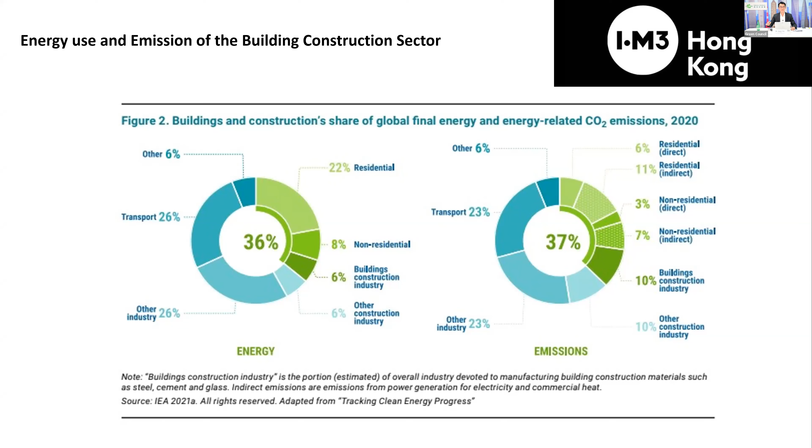And to build on from Professor Zheng's idea, to reduce the carbon emissions, there are clearly two major directions. The first one is, of course, to reduce the embodied carbon from the manufacturing of materials and application of materials on the construction site. And secondly, another emerging direction is to align the material properties with the long-term renovation strategy.

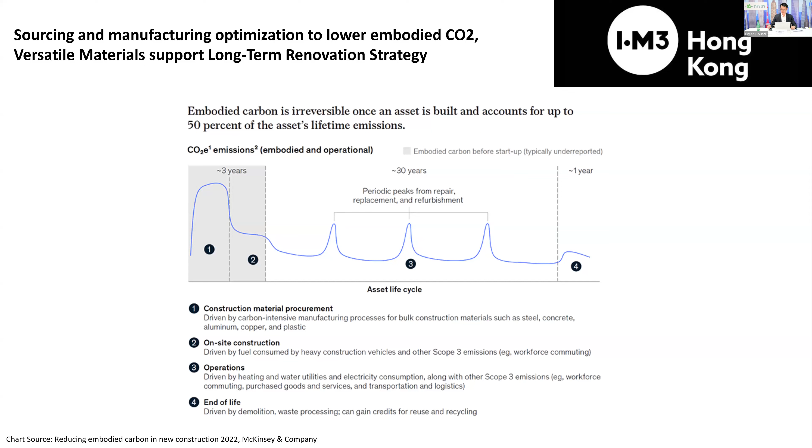And there are also new materials that may enable the reduction of operational carbon, for example, to improve the heat insulation of the building, so that the energy efficiency of the building can be improved. And to determine where we can reduce CO2 or who has the responsibility to reduce CO2, we need to get used to seeing the building sector from this full value chain perspective.

Because the building sector is not a single sector, it's instead a full value chain or full supply chain, from the extraction of raw materials to manufacturing of construction materials to building use and to end of life. Because nowadays, in reality, a lot of material suppliers still find it hard to justify their green solutions or green product design to buyers or building designers. A lot of the time, green materials involve a change of supply chain and a change of people's old practices, and inevitably a little bit higher cost.

So if the entire economy can look at the building sector from this full value perspective, then we may be able to determine who has the responsibility and who will enjoy the benefits, and be able to pass the benefits from one to the other and share some of the initial cost involved in green materials development and also green material applications.

And to fulfill that goal, just in line with the COP21 of the Paris Climate Agreement, we need to enhance the transparency and accountability of the carbon emissions in the full value chain. And a lot of companies have begun to use this methodology to assess their positions.

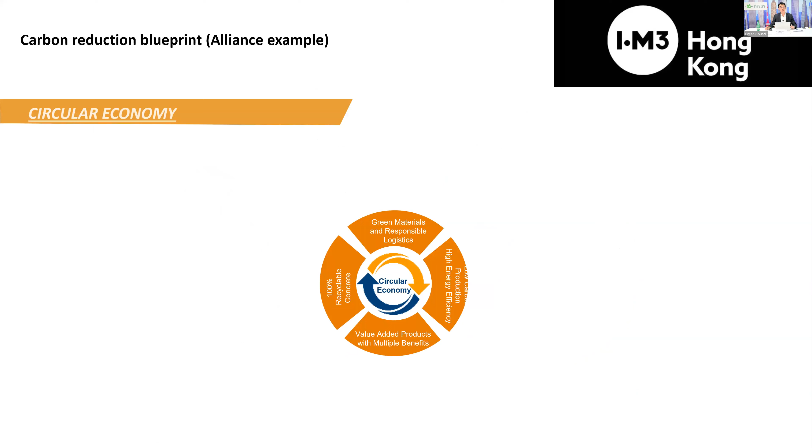And to reduce our emissions, I think many companies would have a carbon reduction blueprint. Here's an example from Alliance Construction Materials. Of course, first of all, we will need to assess the carbon footprints of our products. Because we have a range of product mix designs, we need to know their carbon impact on the environment. And then from the carbon footprints, we will be able to assess the opportunity for improvement on our manufacturing process or logistic process. And then we will be able to reduce our Scope 1 and 2. And actually, our green management system is designed from the findings of the carbon footprint of our products.

And we set ourselves a science-based target initiative to reduce Scope 1 and Scope 2 emissions by 30% before 2030 as compared to 2018. And in 2022, we have successfully reduced the carbon emissions of Scope 1 by 30% already, and Scope 2 emissions by 23%, which is a pretty significant amount because it is almost 1/3 of our total emissions.

And then we would have to work with our suppliers as well, because I think everyone will agree that it is really important to have good suppliers that can be your partners to really reduce your Scope 3, because it constitutes such a huge part of our total emissions. And it is particularly important in the building construction materials industry because a lot of materials are actually prescriptive in specifications. The supplier cannot just change the mix design or production method without the approval from the project engineer and the building designer. So we have to promote the green application together with our raw material supplier so that the materials can be put in the specification more, and then we can really reduce the Scope 3 emission more.

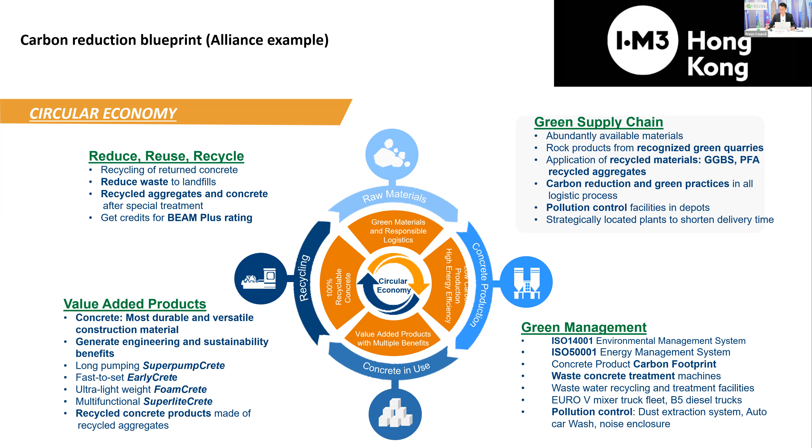And after all the efforts we make to reduce Scope 1, 2, and 3, we cannot avoid some carbon emitted from manufacturing, transportation and construction. Because with raw materials, there must be extraction activities and manufacturing activities. So to account for these unavoidable carbons, there's a program called the Carbon Neutrality Program, which is getting more popular nowadays in the marketplace, to let the contractor or the developer offset those unavoidable carbons by purchasing carbon credits from carefully selected VCS projects.

It basically involves a few key steps. First of all, of course, you need to do the quantifications of the carbon emissions from the construction materials to be consumed and also the construction method to be used. And then second, you make the declarations of carbon reductions. And third, to purchase the carbon credit from those VCS projects to offset the unavoidable carbons. And finally, do the auditing and verification, and then to achieve a declaration of achievement.

Basically, we encourage our contractor to participate in such a carbon neutrality program so that they can incorporate, beside concrete, more green materials into their development. At least we need to get ourselves ready for participating in such a carbon neutrality program.

And looking forward, we are actually hoping that there will be more proactive methods to reduce carbon. For example, we hope that in the future, there will be carbon capturing technology to let the fresh concrete or concrete in use or other construction product in use capture the carbon dioxide in the ambience. We, of course, want to have better product design that will allow the building to have a better operating carbon.

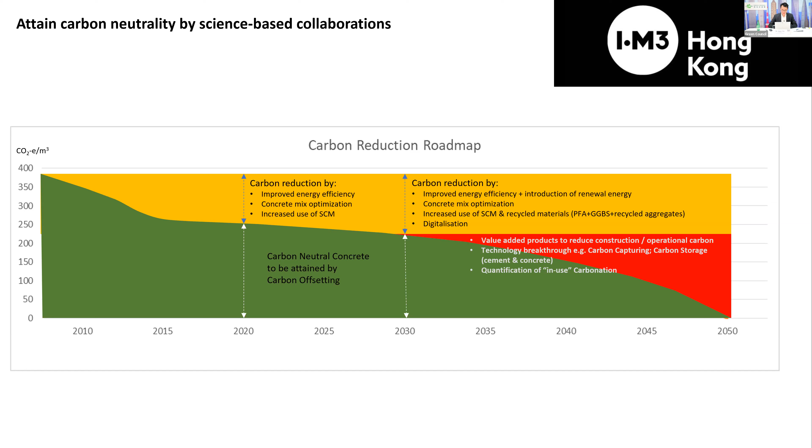Yeah, concrete is still the most abundant and widely used construction material for the construction industry. But it is also promising to see that there are a lot of new materials that have a lower carbon dioxide impact being researched and promoted to the construction industry. We, for example, have bioclimatic materials where the contractor may just apply it after extraction without too much manufacturing on their building. We also have functional materials.

For example, we have PV glass windows that will allow the glass window itself to generate electricity, just like a solar panel for the building. We also have recycled materials. So for example, recycled glass to replace aggregates so that the exploitation of natural resources can be reduced.

And the wider application of them would depend on the property analysis. For example, the mechanical and thermal properties, the supply chain, whether it is easily accessible near the project site, the construction practice, whether it is compatible with other construction materials or existing construction practices, and also, of course, whether the building regulation will approve them to be used on a more extensive scale. It will really depend on how the material supplier or developer tells good low carbon stories to society.

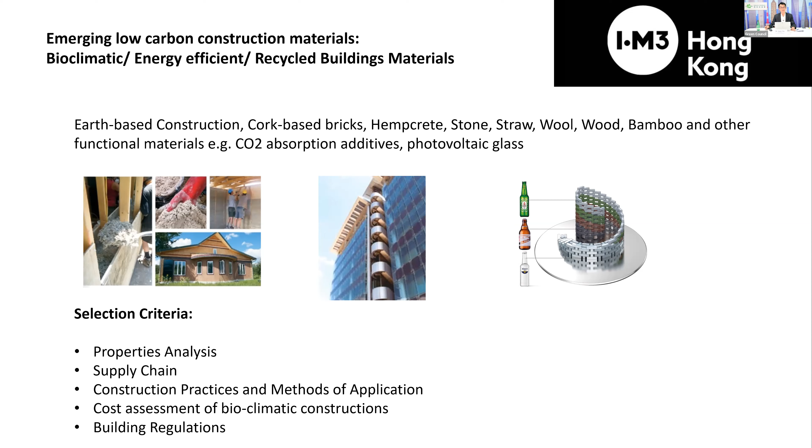And I think what we will increasingly see is the common language of CO2 in the life cycle of constructions, emerging both for us and also for other actors in the building life cycle. And with this common language, we will be able to move toward the carbon reduction goal in a more collaborative and effective way, because we need the entire value chain to move together to achieve that carbon reduction goal.

And I would also like to advocate that beside good materials, beside having a low embodied carbon, it is really important that it can also help the building to reduce the operating carbon in the use phase. For example, if the materials can improve the heat and noise insulation, it may enhance the energy efficiency of the building.

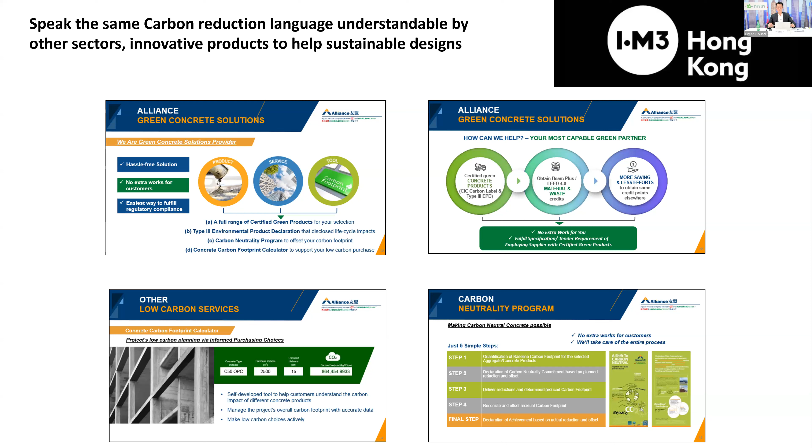And actually, there are already established programs like BEAM and LEED that take into account the design factor together with the material factor to take care of energy use and make use of natural lighting and ventilation. And besides established programs like BEAM and LEED, there are also other options for material suppliers and builders to use.

For example, for material suppliers who want to communicate better with their potential customers, who want to really move forward on their green agenda, they can use the Climate Action Plan 2050. It is actually a more comprehensive and ambitious program, but it is also very open, and not as strict as BEAM and LEED, and it allows more actors or more material suppliers to participate in this climate action plan.

Now, we understand that in the material supply industries, there are still a lot of small to medium-sized companies and even startups. They will find it hard to put together their carbon data to participate in established programs like BEAM and LEED. So this program will allow them to validate their carbon reduction value in terms of opportunities, energy use,

transportation, and circular economy. If they can validate their value, then as time goes on, when they get more ready, they can put those newly developed standards into maybe building codes or stricter regulations, so as to move the entire industry toward a carbon reduction goal.

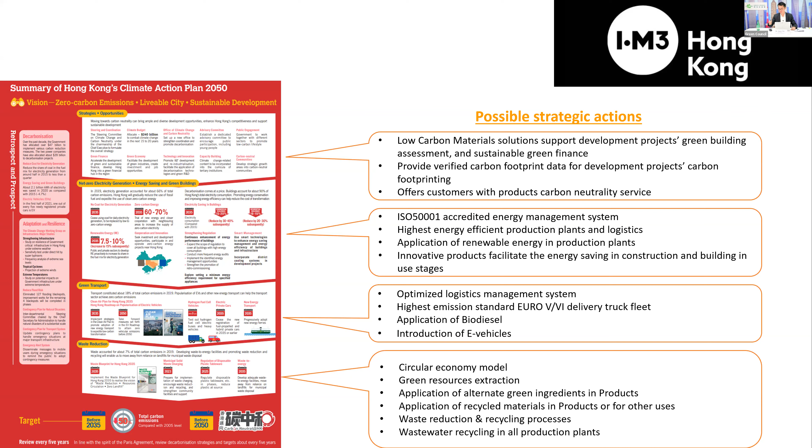Here are some examples of how we try to package our products or operations to be in line with the Climate Action Plan 2050. For example, we use a large capacity concrete mixer truck, which can reduce the emissions from concrete delivery to project sites. We also have some special products that can enhance the energy efficiency of buildings. For example, we have foam concrete, high easy pump concrete, etc.

And then we also have decorative concrete that allows the architect to put some design factor into the concrete, so that they can reduce the total sum of construction materials. And we also promote the beneficial reuse of waste materials to enhance the circular economy.

So I think up till now I have covered the very first question I raised. That is, what roles materials can play in the decarbonization of society. Of course, first we have to be able to quantify our carbon impacts and support the project's carbon footprint certifications, because developers in the future would have to, or would like to, validate that they have a low carbon footprint.

And then of course we have to be able to support better building design so that it can save emissions during the use phase and be more durable for more applications without the need for major refurbishment. And I would say that the focus for carbon reductions has been more on reducing the operating carbon of the building. But we are actually seeing the need to expand the perspective from only the operating carbon to also cover the entire building life cycle, for example, from the construction stage to the end of life. Therefore, it has to start from construction materials.

And one major reason for that is that as we decarbonize energy and electricity generation, the operating carbon of a building will reduce, and the proportion from construction materials and construction works will get larger and larger in the asset life cycle. So the future of construction materials will depend on our ability to tell a good low carbon story based on facts. Therefore, we really have to get the opportunity to participate in certification programs to make sure that our products are really recognized as low carbon products.

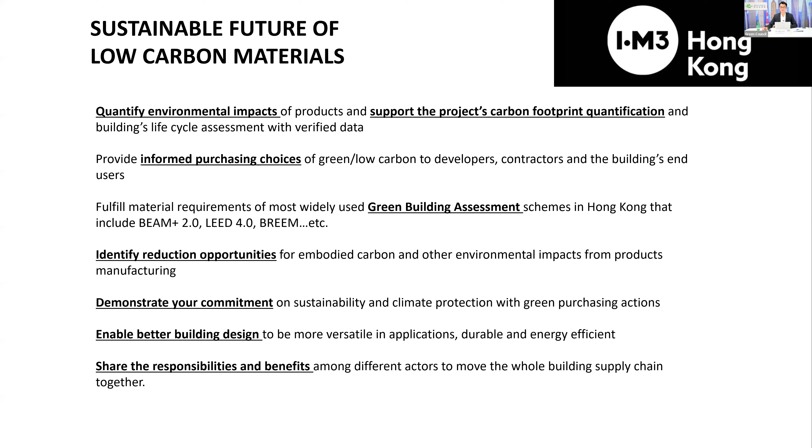I think every company, no matter who is responsible for procurement, is definitely concerned about cost. The third is about supply chain transparency. Whether your product is really green or you just say it is a low carbon product, but it is just some kind of greenwashing. How could you help green procurement with these three challenges? Yeah, Felix, you raise a pretty good question.

As I mentioned in my presentation, a lot of suppliers still find it difficult to verify their green efforts in their product. Because at the end of the day, they need to make sales so that they can sustain their green efforts and their business. And a lot of procurement in the construction industry is actually passive, right? Because they need to follow the specifications and budgets to choose the product they are going to purchase. So we really need to move the entire value chain together and validate the green benefits to the building industry.

Because nowadays a lot of the projects are by competitive bidding, right? Whoever bids the cheapest will get the contract, and then they can continue their business. But I think we really need to take the initiative to start from ourselves, the concrete producer or material supplier. Because if we let it take its natural course, we will never be able to get our product to meet the green agenda of the entire society.